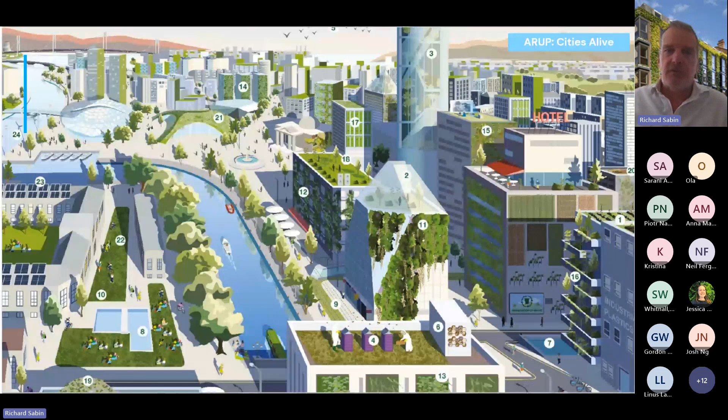They've identified 51 different types of GBGI, and they're currently running through a whole scientific review of the science papers on the efficacy of these different intervention measures. But I think it's really important for us to recognise what green infrastructure is and how we work with it. My favourite definition of green infrastructure is this infographic from Arup's Cities Alive document, because this is the realm in which we work.

We're talking about green infrastructure being deliberate and man-made - intervention measures that are seeking to introduce green into our urban environments for a number of reasons that I'll go into in the why green infrastructure section. Effectively, when we look at what's in the Arup Cities Alive document, I characterise them into 4 spaces.

We have green roofs and podium slabs, so areas of horizontal landscaping on man-made structures. We then have the park spaces, where you can have pocket parks and linear parks. We then have the vertical structures, where we start and where we excel, which is the green walls - climbers and fully comprehensive green wall systems, which I'll go into a bit later.

And the 4th subset, which I think is really important, particularly in northern climes like where we are, is the internal landscape as well, and how it's important to have green infrastructure in that internal landscape too.

So here's some examples of that level of green infrastructure, and I think they're really inspiring in terms of how they impact on people and spaces and places, and just the way in which these linear parks - like the top left, which is the New York High Line - can really become a destination space where people can breathe, relax, be in nature whilst they're in the middle of the cities.

In the bottom middle, you have a lovely linear park, or linear horticultural feature, running up the side of a road with a swale running into it, looking at stormwater attenuation. So there are various different ways in which we can start to introduce green infrastructure for a number of different reasons.

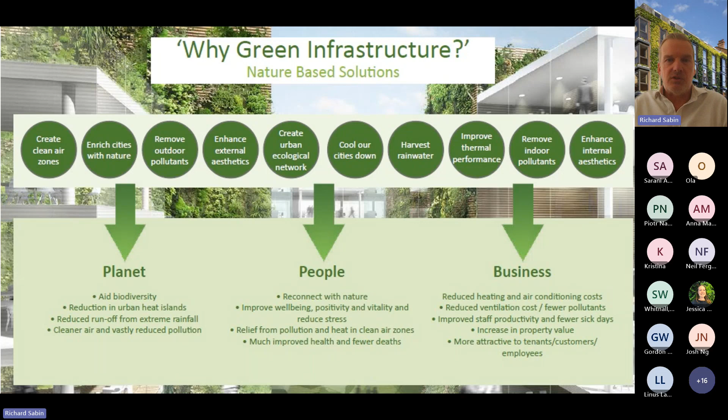So firstly, let's look at some of the thermal issues. We're looking at climates that are starting to go a bit wonky, is probably the only way I can describe them. There are a number of studies that look at how climate change is going to impact cities by 2050. Cities is where more than 70% of the urban population lives, so it's pretty important that we have suitable environments in which people can live.

There's some pretty interesting statistics here, and it's not very far away. 2050 is only 26 years and 3 months away from where we are now. And we know we suffered in London that week in July last year of 40-degree heat.

Well, there's just literally this week been an independent climate resilience report, an interim report on that study, that has found that London could experience multiple 45-degree C days in the foreseeable future. And Sadiq Khan said this is potentially buckling various basic functions of the city.

It means the underground is not fit for purpose. Summer homes are too hot in the daytime, care homes and schools too. It means we have to adapt to these temperatures now. It's now time for those who are delaying action to wake up and smell the coffee, because this is happening now.

So we have this interesting real problem of temperature and how that's going to impact into cities, and its impact on heart attacks and asthma, etc. as well. So there's a real health issue coming in here.

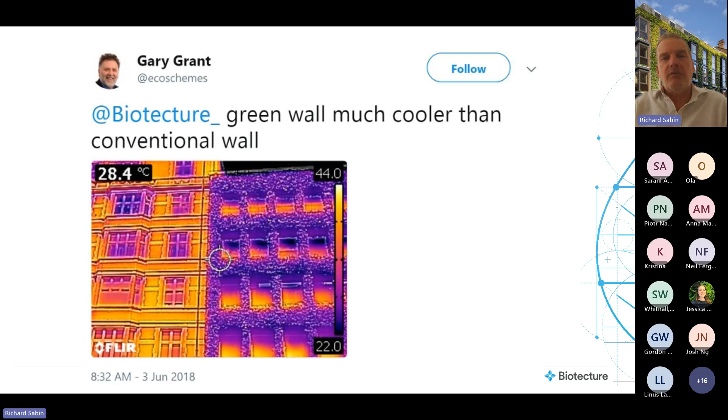How is this going to impact primary energy? How is this going to impact thermal comfort? And if we do it at scale, what sort of an impact could we have on being resilient in terms of urban heat island? The second example I want to pick out is on biodiversity.

At Biotecture, we've been seeking for years to reconnect people with nature, and that's one of our fundamental tenets of what we want to do. Sadly, it's really clear that humans and nature have never been more disconnected, and our impact on nature is sadly very obvious with the 6th extinction event going on at the moment with the biodiversity collapse. So again, we need to start looking at this as part of the holistic work.

And again, a way that green infrastructure can help - I'll just show you a very quick few seconds of this video. This is taken at the top of Edgware Road, a living wall we've installed for 12 years. You can see the traffic on the right.

The living wall was installed on the back of some clean air funding, and we have a number of bits of test data on how useful the living wall has been in terms of cleaning particulate matter particularly, but also you can see the bees - the bees are there and really enjoying themselves. So this is part of the holistic way in which green infrastructure can help to deal with the multiple issues that are around.

And one of the points that I wanted to make around sustainability and green infrastructure is there is a current modern focus on net zero carbon, which is really, really important, but it's not going to impact those temperatures by 2050. It may impact temperatures by 2100, but it's not really going to have much of an impact in the next 10 or 20 years.

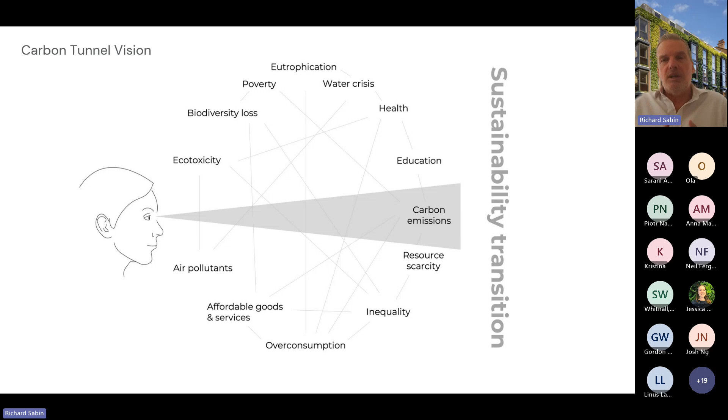So we need to have these holistic solutions, and this is where green infrastructure comes in. Before I come onto the living walls element of this, it's really important to understand why being in plants or around plants is really good for us.

I believe it's the combination of the physical properties of plants, the fact that they give us the perfect cocktail of air for our lungs to breathe globally. It's only when we have man-made local events in cities and some natural disasters that air quality will reduce.

So the perfect cocktail of air. Nature, plants provide us with food, shelter, medicines. And then there's the biophilic connection that we have with nature that is for our well-being, for our mood, for our recovery times from illnesses, which science proves are faster if we have a view of nature.

I myself have been through this in terms of mental health issues and being able to go walking in the countryside just to restore what's going on. And at a very basic, simple level, being in or looking at nature reduces heart rate and blood pressure. So having that balance of nature around us is really, really important.

Often we have a 5-day, 2-day balance where we spend 5 days outside nature, just in offices or wherever we might be. And then we have 2 days where we get to go and escape to nature, to go walking, to go and do what we want. We want to try and redress that balance.

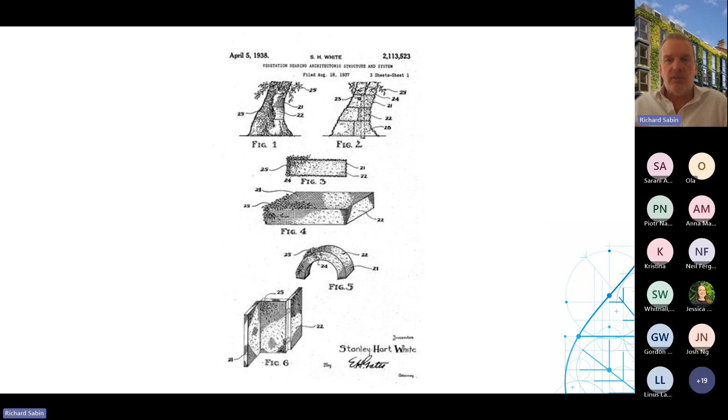And the next guy to come along was Patrick Blanc. Patrick Blanc is an absolute pioneer, an absolute visionary. He's a French botanist. I've had the pleasure to work with Patrick on two projects, one in 2007 and one just earlier this year as well.

Patrick's interest is more in botany than architecture, structures, or irrigation. He's more interested in which plants from around the world he can introduce. In fact, it's from Patrick's botany that we introduced the idea of the architecture and cladding panels to try to match the two. So we call it botanic architecture, and we're trying to look at how that all sits, fits, and works. Patrick is an absolute visionary, and his work is a real inspiration to us all.

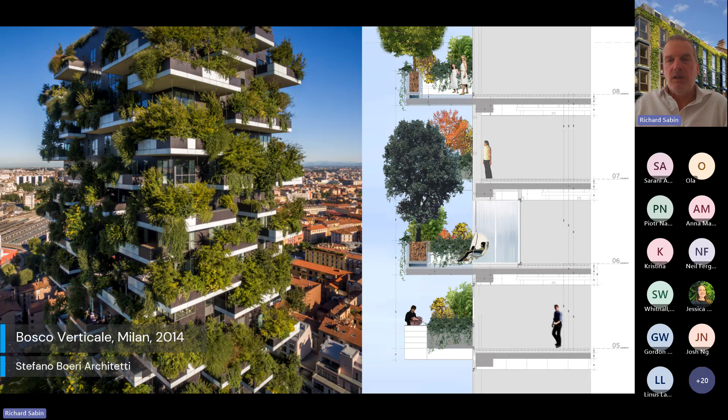We start to look at some of the real benefits the plants will give in terms of ameliorating temperatures up in these spaces. For me, that's a wonderful example of how we should be, or could be, working with green in spaces. Now for the standard kinds of vertical greening.

From left to right, we have plants growing up buildings, using the building to grow. I'm not going to go into that in more detail because it's not something we work with—it's more of a natural feature, like a wisteria or ivy growing up a building.

It could have structural issues because it's latching onto the building to do various bits and pieces. It kind of goes where it wants to go. We've all seen examples of it, absolutely beautiful. But if we're in our workplace specifying buildings for other people, it gives everybody a bit of a shudder to think of green just being allowed to grow up the fabric of a building without some sort of framework in which to do that.

So the three areas I want to focus on are the climbers, which are in number 2, the trough system in number 3, and then number 4, which is fully comprehensive living wall systems.

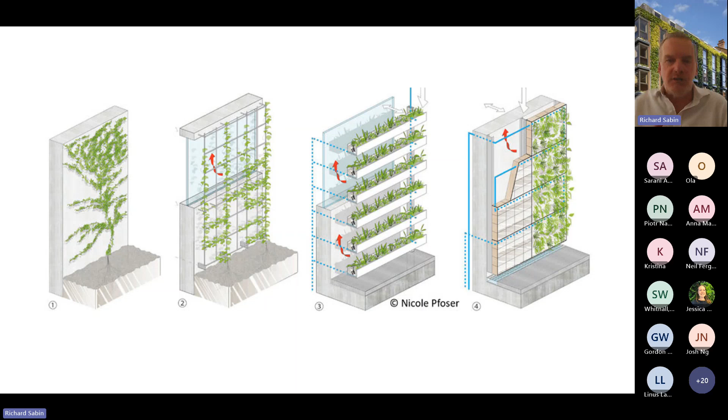So looking at the climbers up at cables and wires, there's real opportunity for these to be absolutely fabulous on buildings. The image on the bottom left is some work we did at a car park just to green up that space. Originally individual cables and wires, and now it's forming a complete ivy screen. At the top you have the jasmine growing up cables and wires, and on the right a much larger building showing this more diffuse type of greening.

There are some real benefits of this type of greening. One of the places I really like this is almost like a natural brise soleil on buildings, where we can go in front of windows. For example, if we're using deciduous plants on a south-facing elevation, we can allow the leaves to disappear in winter to let light levels through, but in summer the full growth allows only diffuse light to come through. This will have impact on primary energy costs because air conditioning requirements will be reduced by the natural element of the brise soleil.

This is just using an old technique of using nature to overhang buildings, but we can do that deliberately with cables and wires. It's not done enough in my opinion, and as we focus more and more buildings on full air conditioned sealed units, there's much more we could be doing with nature.

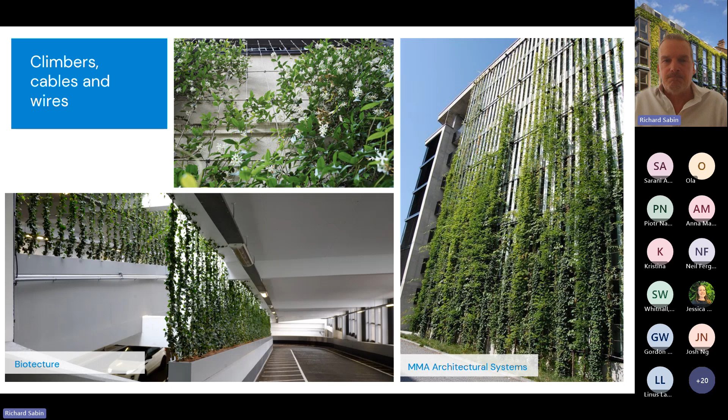When we talk about ivy screens, we've all seen these, often on construction site hoardings, sometimes surrounding schools. They are great barriers for air pollution reduction, and they're generally pre-grown, so they come already established, and you can do some really interesting things with them. We work with a company in Germany called Helix Pflanzen Systems, and they use these ivy screens to clad whole buildings or provide an external skin to the cladding, which I think is a really nice way of dealing with those.

Moving on into box systems, which is more sort of troughs growing up, troughs being placed on the wall, and then plants growing in a much more natural horizontal environment. We tend to find, interestingly, that even when we grow fully comprehensive walls with plants growing out of the wall, the root systems still understand gravity and still grow downwards. This recognition by plants of where light is, where gravity is, is really awe-inspiring to witness.

So we've got these sort of open trough systems where we can start to think about how we can do that. We've also got a more closed trough system, which we use at Biotecture called Plant Box. It's a stackable modular trough. It just happens that the troughs are very interlinked, so it starts to become more akin to a fully comprehensive living wall system. One of the big benefits about a system like Plant Box is that as the...

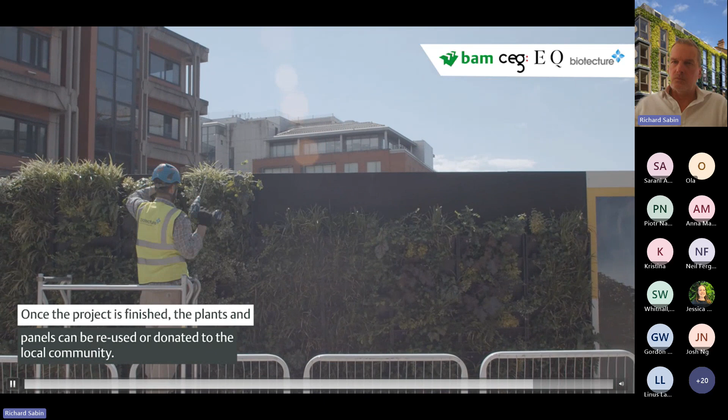I think the reusable nature of the plant boxes and the way that it works really allows us to think about circular economy, but also to start thinking about green infrastructure as an asset to be nurtured rather than a liability to be maintained. This is definitely the way we're starting to talk to clients now.

We want to see what we provide as assets. And in that, it's interesting because we need to nurture and improve an asset, and sometimes we need to start thinking about changing it, depending on whether we're looking at air pollution reduction or biodiversity habitats, etc.

As we move on into more fully comprehensive living wall systems, I've got on the screen our system, our biopanel system, our naturally resilient biopanel system. There are others - soil-based systems, pocket systems - and each does a job of providing fully comprehensive living walls, basically plants across a wall to provide, hopefully, 100% coverage of green.

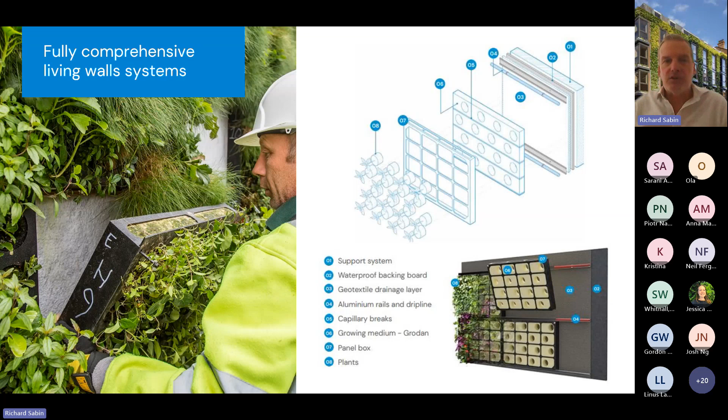Each of these is supported by an irrigation system, and you can go all the way from a tap timer right up to our preferred method, which is remote sensed irrigation systems, where we can control off-site, monitor off-site, and change the irrigation cycles as we wish. I'll go into more detail about how this works in the compliance and delivery webinar.

A couple of examples of where we can use fully comprehensive living walls: one is on a retrofit building, the other is new build. When we talk about new build, we can also consider the rainscreen cladding element - the living wall as being a rainscreen cladding element of the building, replacing whatever rainscreen cladding you might have thought of. The living wall can be an irrigated, planted rainscreen cladding.

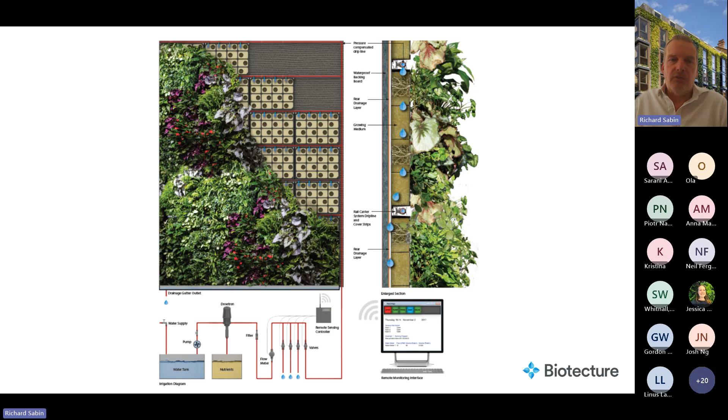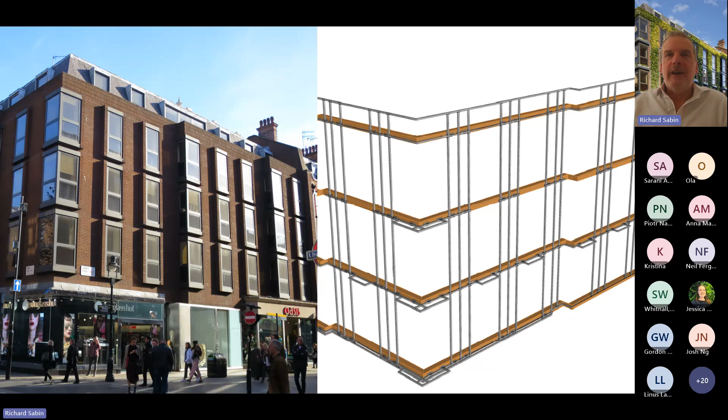So firstly, retrofit. This is a building we retrofitted in 2017, working with Capital and Counties, now Shaftesbury Capital, opposite Covent Garden Tube Station. The existing building was a brick building that they were considering demolishing, and we were asked to come and have a look and see what we could do.

We had to work with the structural engineer and the frame to make sure we were tapping back into the main frame rather than just fixing to the facade of the building. We looked at how that works, and on site you can see here how we're tapping back into that framework.

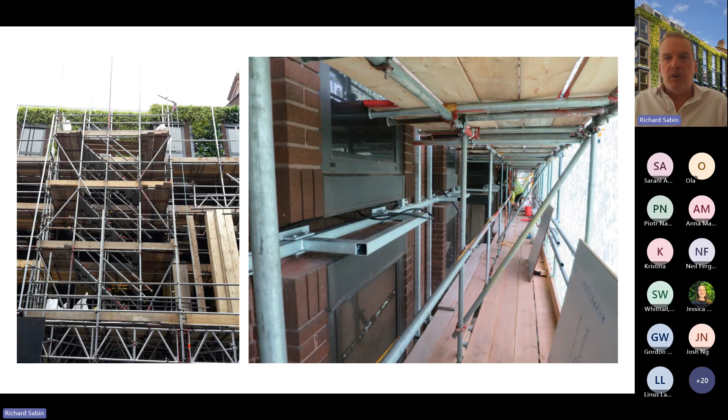The original requirement was for a 5-year temporary planning permission to be put onto this green wall while they thought about how they were going to redevelop that building. So we go through the process in our nursery of putting the panels up, planting those panels.

There are two reasons why we plant up in a nursery, and I think they're both really important. The main one is to get good root growth in an environment we can manage simply, with our horticulturists at head height level being the top, rather than 20 or 30 meters up in the air. The second reason is because there isn't a second chance to make a first impression.

So when living walls go out there, we want them to look absolutely fantastic. This living wall that we installed on a 5-year temporary planning permission immediately got relevance in the area as a vertical garden in Covent Garden, as the gateway there.

The dwell time increased in that space, and the client quickly recognised that this was becoming an iconic building within the area. So now the planning permission has been changed from a 5-year temporary to a full-time permanent, and they see the green wall there very much as an asset in that environment.

So moving on to new build, I'm picking an example here from 2014 - some time ago. This is 20 Fenchurch Street, just under the walkie-talkie building, where we've got a 700+ square metre living wall installed.

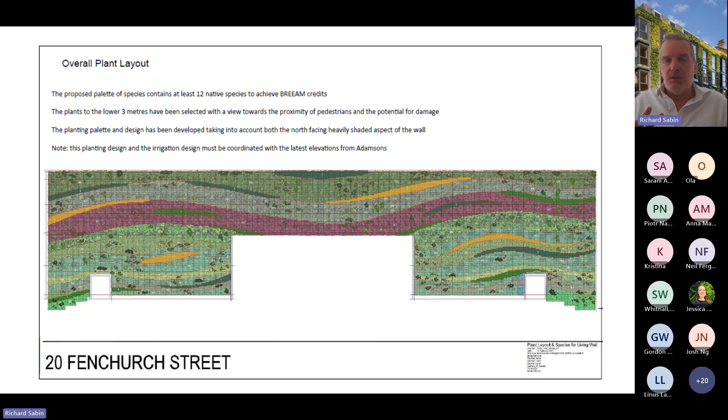And we go through the whole design process. Part of the design was around BREEAM, around habitats, etc., but we're also looking at planting design as well. Something I'll go into again in the next webinar is the detail of how this is then fixed back through to the building.

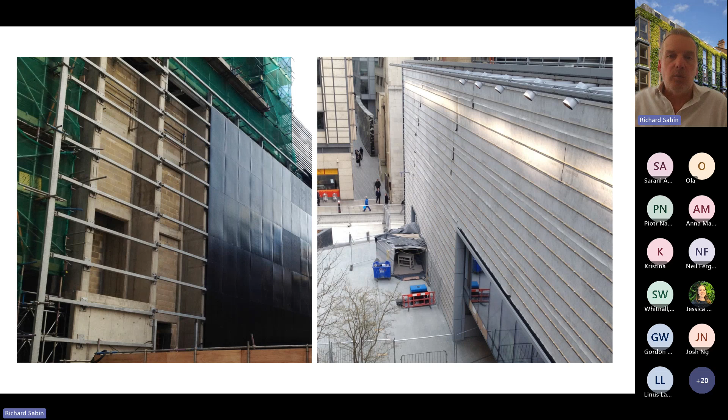On install, this is what the living wall looks like. This is why we pre-grow in the nursery, because we're able to get this fantastic look and feel. Yes, it looks a little bit juvenile, but at the same time it's already got that full look to it. Over the years, we can start to think about how we sculpt and change that.

At 20 Fenchurch, this is a picture taken this month, so this is at 9 years old. Two years ago, as a precursor to New Street Square winning the award, this project won the Skyline Trophy award winner at Flowers in the City. We're really pleased and proud with what we can do here.

So that's fully comprehensive living walls. The extension for us is around the ecosystem services, particularly focused around biodiversity. We like this idea of vertical forests. We understand living walls need to look good and have a really good level of coverage, but we also want them to be able to do more, and we want to be able to sometimes introduce deciduous species.

On this project in London, which is a very large project, it's 1,800 square metres, almost 60,000 plants, and nearly 750 habitat boxes. We've also got deciduous plants creating small microclimates.

Some of the habitat boxes look like this, and we're really focusing on habitats for bug hotels, solitary bees, ladybirds, lacewings, almost food stations for birds and bats.

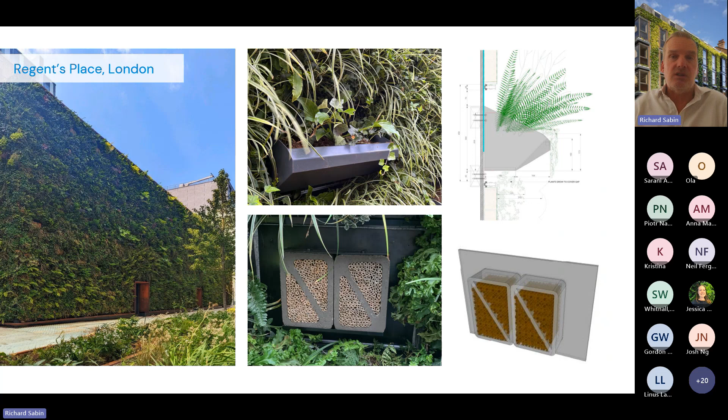Compliance is another thing I'm going to touch on in the next webinar, but it wouldn't be right not to talk about compliance. I think it's really important that we, as a construction company, particularly as a cladding company, start to look at the appropriate levels of compliance of our product within the environments in which we place it. So for us, this means we need to go through the same testing as if we were a cladding company without plants and irrigation. I was going to say a boring cladding company, but I don't necessarily mean that.

A cladding company that is smooth and dry, that just has panels, needs to go through the same testing regime to prove that we are a cladding company that can deliver, as well as providing the fluffy stuff that goes on the edge of buildings. It's really important that we show that level of compliance.

So we've actually had to go above and beyond, because green walls are seen with slight suspicion, particularly around the fire issue, where it's very difficult for a non-conforming material to go the extra mile to demonstrate full compliance, even though we believe there are ways in which we have done so. I won't go down that rabbit hole in this presentation, but I probably will in the next one, and I'm sure there'll be a lot of questions around the compliance of product.

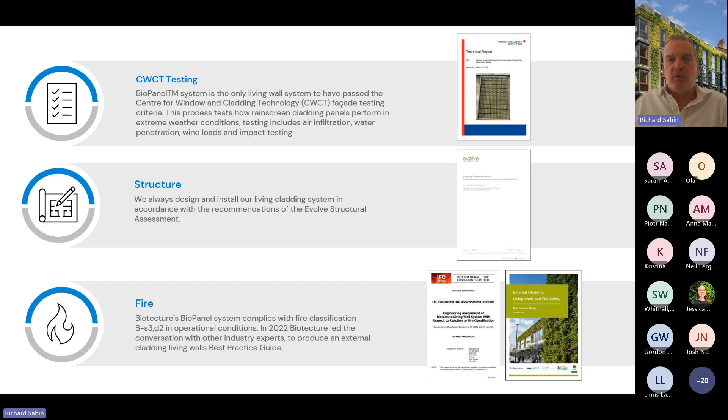But I also want to talk about the benefit compliance that we can offer as well, which I think is really important to think about now. Again, we come back to all those holistic reasons for green infrastructure, and we start to think about some of the factors being put in place that will help developers to do the right thing - I think that's the only way I can put it.

But sometimes it needs compliance factors. I do know things like developers who are being more sustainable and more green have access to cheaper funding because they're being more green.

But there's also things like the urban greening factor in London, and we work as consultants, working with either architects or landscape architects or directly with clients to maximise urban greening factor. We're now increasingly starting to work with clients on biodiversity net gain, which I believe gets royal assent in November this year. And then there's a lot of other standards and compliance standards that I think are really good, because these allow us to deliver green infrastructure.

I think we should go further with compliance. I think there should be government grants on green infrastructure in terms of putting that into cities, and it should be much more flag waving around green infrastructure and the benefits that come from it. Yes, it has to be safe, and yes, it has to be compliant, but let's also focus on the benefits that it can give us as well.

So in terms of those benefits, I'm going to come towards a close on the presentation by going through 3 areas where we've demonstrably added value with green infrastructure.

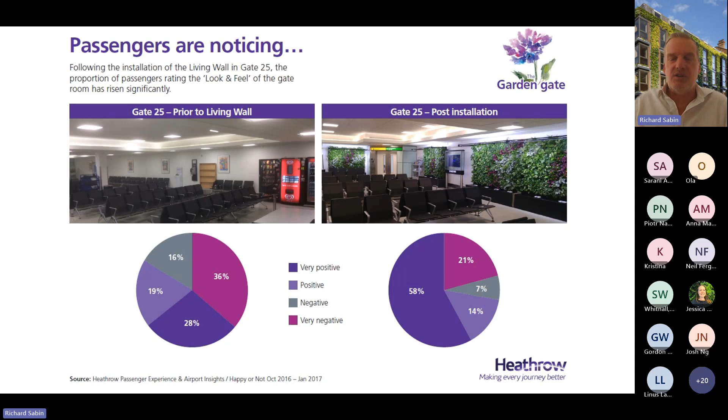So that's Heathrow Airport. My second example would be Canary Wharf. Now, Canary Wharf's been in the press a lot recently, obviously with the post-pandemic and some of the people leaving the office spaces. I don't know if everybody's been to Canary Wharf recently, but it is transforming massively.

It recognises its need to change as a space and place from a 5-day-a-week workspace into a 7-day-a-week work, rest, live and recreation space. As part of that, they've invested a lot of time, effort and money. We've worked with them in 10 different locations, particularly around gateways to Canary Wharf, to introduce green spaces where people can sit and relax.

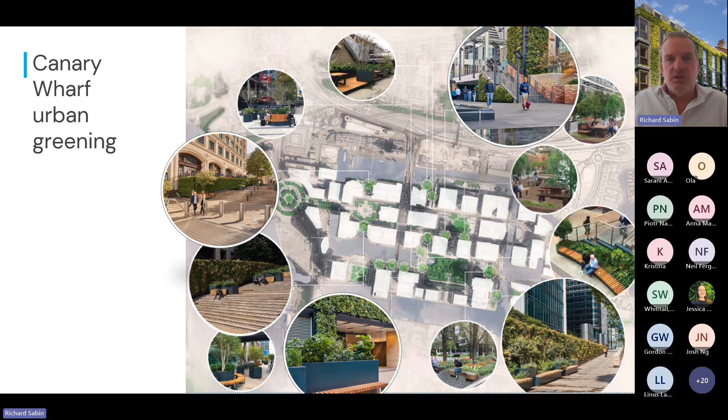We've got multiple living walls, multiple urban parklets that are going in. This is about the future of Canary Wharf, about it really cementing its place in the future. I believe it's fantastic when you go there now. It's a destination space to go to at weekends now. Just 3 examples sitting around here.

Probably my favourite example is this desolate space that's opposite the Elizabeth Line entrance. We've converted it into a full-length green wall, and then there's these urban parklets added in too. Suddenly it becomes a space that's not used to a space that people can use, walk past, enjoy. And it's not just conscious, it's also the subconscious impact that these have.

So what we're looking at in Canary Wharf is very much placemaking. It's also wayfinding and ways of reconnecting people with nature in a way that restores them. Canary Wharf make no secret of the fact that they want to encourage people back in for the non-work things that they do, but also people coming back into the office. If they've got a chance to escape out into a park like this, then they're more likely to come back in.

Our third example: we saw previously that we'd installed in France earlier this year a project for McArthurGlen, working with Patrick Blanc. Well, this is one we installed in 2019 in Ashford in Kent. It's a huge project, over 2,000 square metres of green walls, and this is to our own design.